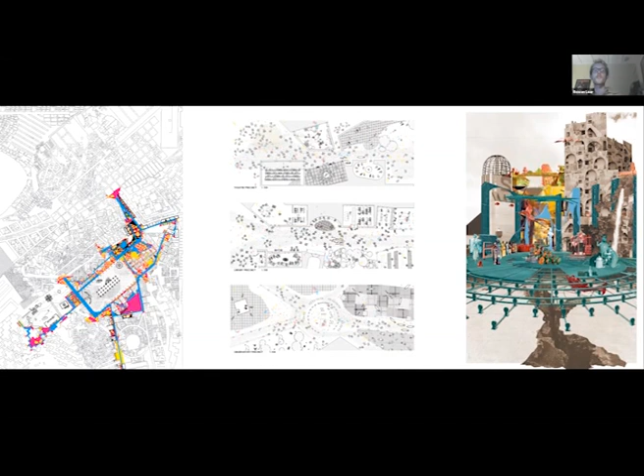The task of the Planetary City Studio has been an exploration into new forms of inhabitation set against the hyperdense background of Planet City, a near-future metropolis host to all of Earth's 8 billion people. The studio focuses on the typology of the Soviet social condenser, wherein performance was key in the development and propagation of alternative social values. The social condenser was an education scheme which used the methods of cinema to extend the scope of audience and situate ideological experiences at the forefront of culture, an extension of the project for total education for the new socialist citizen beyond the classroom or workplace. Social condensers provided the toolkit for us to understand how ideology manifests within rapidly changing environments.

In order to deal with the cosmopolitics of Planet City, our project has been conceived through the lens of a contemporary manifesto, calling for the radical planetary existence made by Bruno Latour in Down to Earth. He gives a recount or preamble to Planet City, a society unable and unwilling to respond to the oncoming climatic crisis. In our narrative of the space, which has been essential to our studio, society did not avoid that breaking point. However, it was given a second chance. Planet City was founded on an encounter with the new climatic regime.

Our reading of the Likhachev Palace of Culture is perhaps the downfall of the Soviet condenser, in that it existed as a funnel from other spaces in the city into a site, rather than an infection of the urban fabric around it. Our project aims to support the ways of living necessary under a new climatic regime, rather than the extractive practices of globalization or the denialist practices of localization.

This process of recalibration is underpinned by challenging the systems which perpetuate Western empirical knowledge and thereby keep it under lock and key. The project profanates the typologies of observatory, theatre, and library, three pillars of the Enlightenment. Rather than operating as fortresses for the superiority of empirical Western traditions, these institutions aim to open the gates to diverse and confronting traditions of thought and knowledge.

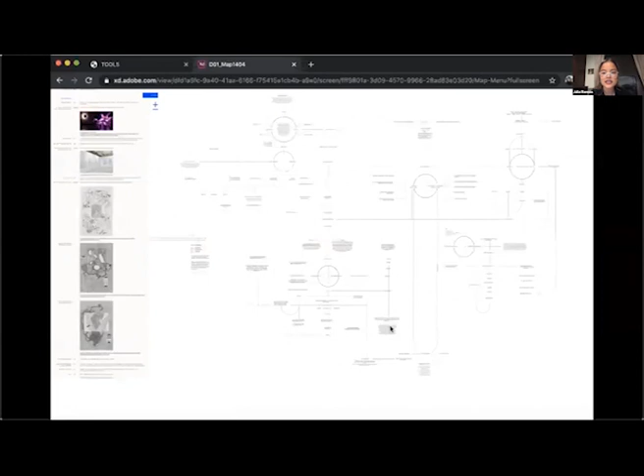In the same way, Nolan uses his tools as a vehicle to produce counter-narratives and dismantle dominant colonial discourse. We use these tools as a lens to speculate and unpack the workings of his practice. The tools most prevalent in his practice are astrology, scientific notation, decomposition, and the hand.

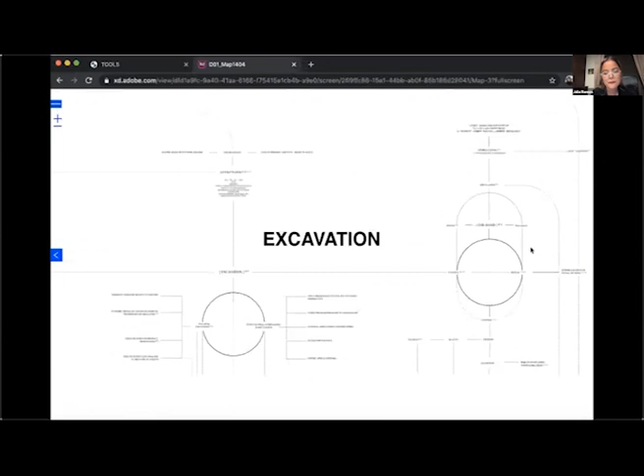Astrology is both a functional and symbolic system that opens a metaphysical framework where alternative and imagined realities can be generated and anticipated. It reflects upon the role and recognition of Indigenous sciences within a dominant scientific discourse. These systems of forming and exploring conclusions are embodied through his use of scientific notation. These alternate ways of reading and understanding time and space are further embodied through excavation, a tool which creates a means for the past to speak and generate tangible memory.

Its interpretation and reading reveals a multitude of truths, and these truths are connected through land and narrative. For Nolan, decomposition becomes a tool to embody the entanglement of past, present, and future, and a tool to compose. Finally, the hand is the initial and final tool in his process. It is a means of control to conceal, reveal, decolor, and reconstruct his narratives, deconstructing, demonstrating that the act of making things invisible is revelatory in itself.

This map explores the organized yet entangled nature of his projects and highlights the non-linear conditions in which he operates, an instance of which occurs in his 2018 solo exhibition titled Options, encompassing a range of artifacts, mediums, and works. He challenges the notion of finished work, using its vulnerability to misinterpretation as an opportunity for new knowledge to enter the space. He states, 'I think the work is only halfway done until it is read. The question is always who is reading, and therefore who is doing the other half of the work.'

The second document gives the user autonomy to navigate through the map of Dennis's practice. Starting with the main tool, the themes, theories, projects, and historical events are presented as options to interrogate both Nolan's practice and our methodology of researching his practice. As the user clicks through, a record of their path is generated on a receipt, which becomes a document where you construct your own narrative of Dennis based on your decisions.

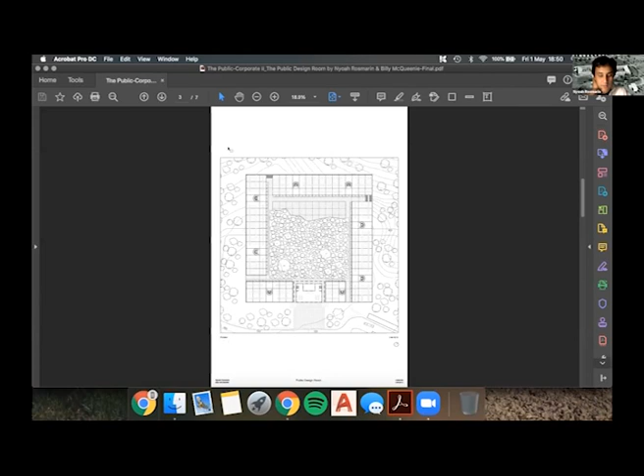Otherwise, the Public Design Room follows a private developer economic model. This operates where the office purchases land for a public building, the costs of which are offset by developing a private rentable project. However, as a social enterprise, the intentions shift from profit maximization to public good. The private development aims to only cover the costs of the public one and nothing more. Any additional revenue is plugged back into the state. This means the cycle of production is heavily managed by the office itself.

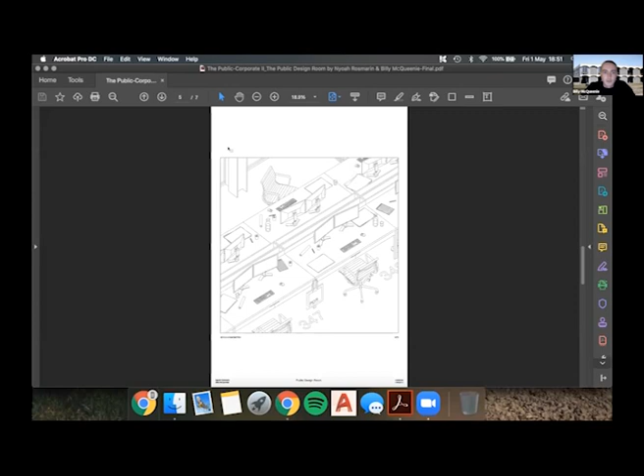The Public Design Room operates through the majority of staff directly working on the production of architecture. 850 staff are dedicated to the drawing room. 150 employees make up the auxiliary programs of the office, including a library, workshop, grounds maintenance, and others. Included in the 850 staff are the multiple in-house disciplines required to produce architecture, such as engineers, town planners, and architects. The Public Design Room aims to establish a consistent approach across the scale of office and works at 3 scales: the territory, the building, and the detail. Through a series of territorial interventions, buildings will be developed using a consistent shared body of knowledge in relation to detail and construction.

Armidale can therefore be seen as the initial territorial project of the office, and the Public Design Room as the first building to be executed as part of it. With the introduction of 1,000 staff and their respective families, Armidale will experience a population increase of roughly 10% and will inevitably alter significantly to accommodate this. Our proposal acknowledges this condition that precedes any architecture and further recognises itself, the architecture, as a well-intentioned but violent act.

The scheme wraps around the existing Robb dining hall. It repurposes it as the entrance and corrects the facade by demolishing the back of house, bringing the iconographic courtyard elevation to the street. Entering through the new lobby leads to a courtyard where the topography remains as found. The insertion of a platform follows the slope of the site and transforms the descending land into a flat, heavily planted and curated reserve. Long open drawing rooms flank each side, with meeting rooms and offices on the mezzanine above and auxiliary programs located in the level below. Services and parking sit in the basement. The building contains only a few ideas, but has ambitions to follow them through to the furthest possible degree. Thank you.

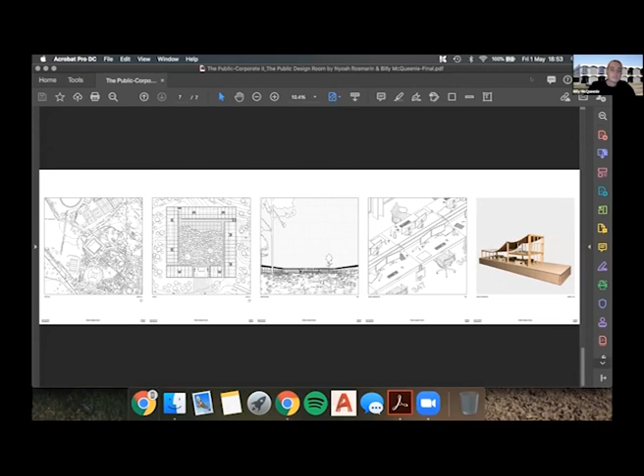Hi everyone, can you all see the screen? All right, tonight I'm representing Angelo Candalepas's studio, A Reading Room with a Throne. However, this presentation is going to be a little bit different to most. I'll be showing a variety of work from a number of students as well as my own in order to encourage discourse and critique of the studio's processes of design as a whole.

The studio will consider how to read architectural space, provide guidance into an understanding of proportion and how this affects the human condition, balancing between that which is drawn and that which is experienced. It will focus on transformative space and the concept of restricting possible outcomes in terms of external parameters and room forms to enable a focused consideration of the variabilities and expression available in architectural space.

This is the site, the Greek Orthodox Archdiocese of Australia's Cathedral of the Annunciation of Our Lady, home to the Archbishop of the Greek Orthodox Church. The brief is the studio's title, A Reading Room and a Throne Room, currently being developed by Candalepas Associates in their practice.

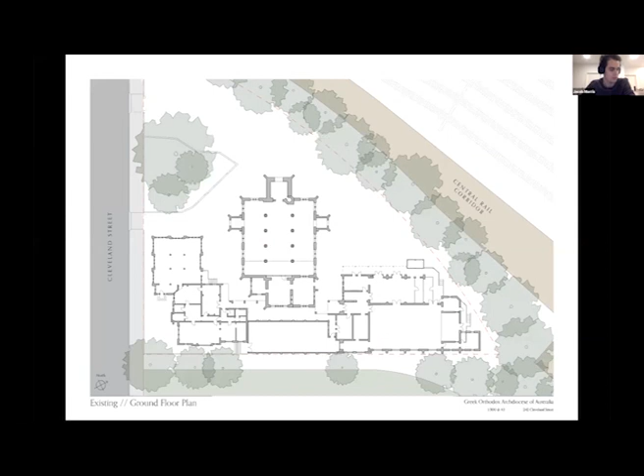The site is historic, a combination of Anglican and Western buildings, with the church itself designed by Edmund Blackett, who also designed St. Andrew's Cathedral. The set precedent for both the office and the studio is consistent: the San Lorenzo Library and its entry room in Florence, designed by Michelangelo.

The studio will delve into historical considerations of early Christian architecture and will visit various historic cities, including Constantinople, Florence, and Rome, in order to draw a lineage between early and Renaissance ideas about public rooms.

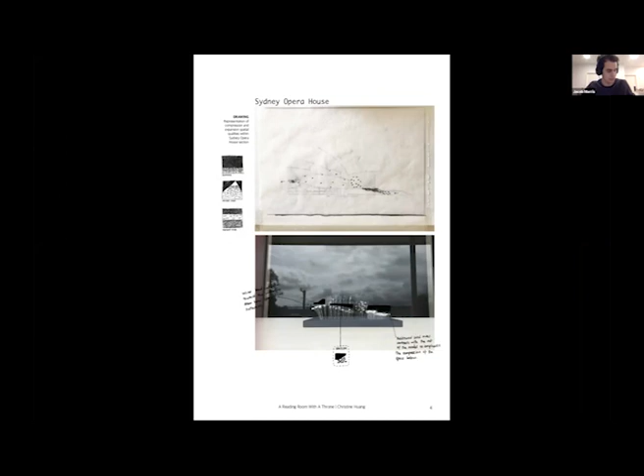All of us took on the Sydney Opera House as a precedent exercise, with the task asking each student to analyze the spatial experiences they perceived, whether through section, photograph, or, if they were lucky before social distancing, personal experience, and to model them in abstract form.

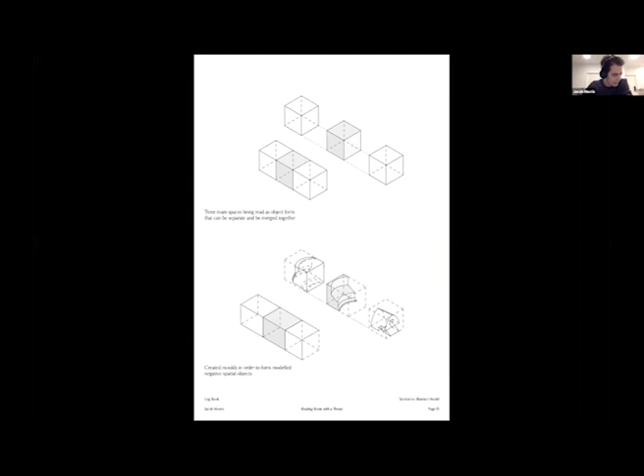What arose from this was a discovery of a very specific set of design spaces and thresholds: a compression of space to an expansion of space, a heaviness of atmosphere to an almost weightlessness quality. These journeys between spaces through these thresholds were then attempted in model form.

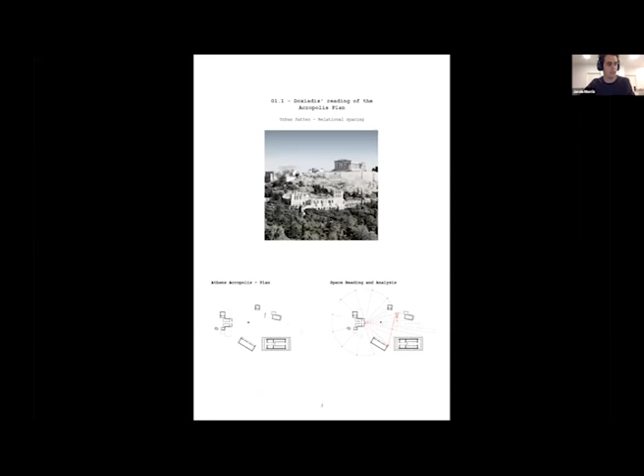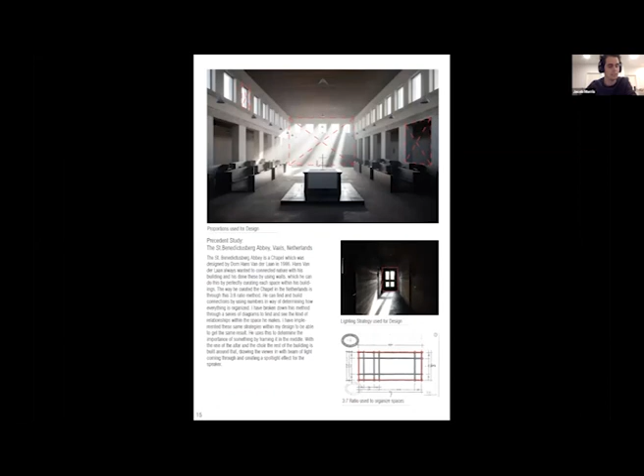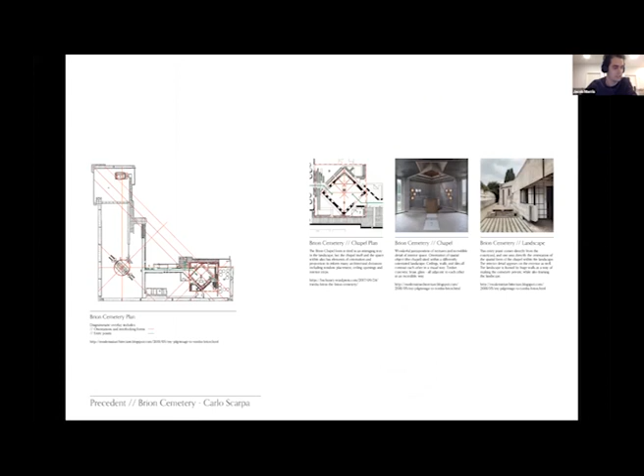Each of us moved on to our own precedent studies next. These included Doxiadis' reading of the Acropolis in Athens, the Theatre of Herodes Atticus also in Athens, the St. Benedictusberg Abbey in the Netherlands designed by Dom Hans van der Laan, Hagia Sophia in Istanbul, and the Brion Cemetery in Italy designed by Carlo Scarpa.

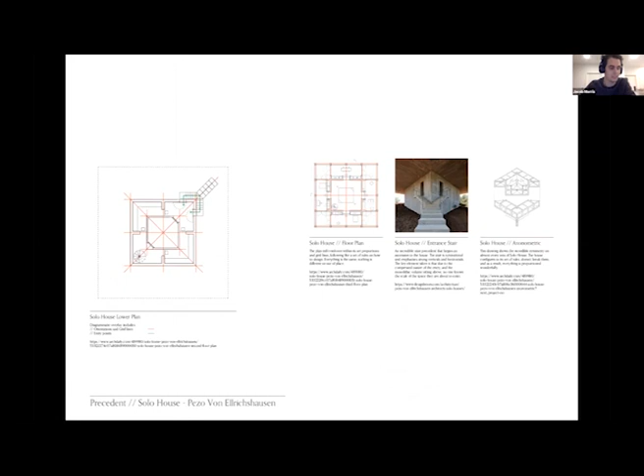These laid the foundations of understanding of proportions, sightlines, geometries, and orientations within the design of spaces. Further detail can also be taken from precedents: the way a column or wall is designed, the way one material intersects another, the way a specific stair is aligned—the impressions are endless. A combination of these values, along with an understanding of these foundations, meant it was time to begin designing.

For our studio, however, this didn't mean drawing. This meant writing—documenting our ideas of the spatial experience each of us envisioned for our design. 'Are you kidding, Angelo? We've just spent weeks with precedents ready to tear into designing, and now you want us to write?' But it was a little bit more than that.

How can you use words to describe the space you want people to experience? How do you want your space to feel, and how can you achieve that? Are you successful? How vivid can you be with your descriptions? Words leave themselves open to interpretation, and so the space envisioned by two people after reading the same passage is always different.

A combination of all these elements takes us to the beginnings of a design, an idea, a concept—whatever it might be. The combination of these elements, and the way in which they become encapsulated into a design, provokes some really interesting questions.

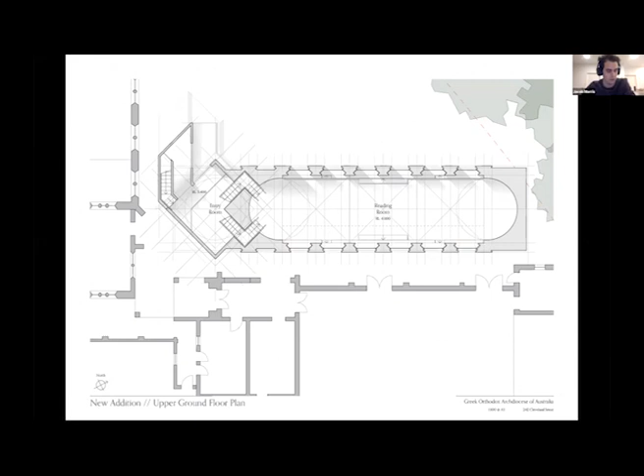How does the site inspire design? What begins to take priority when planning or designing a space like this? Is it the books, the throne, or the purpose of the room? Or is it the experience and the actual spatial considerations that come with it? Is it best to look towards historical precedents or towards newer design methodologies? All of this relates back to the notion of hierarchy and priority while designing a space.

Our tutorial this morning went a step further and was focused on a new process integral to designing an interior: sectional models and their play on light and shadows. This isn't just about how light falls or is brought into a space.

This is about what type of light is drawn in, what it might fall on in terms of materiality, and the orientation of the surface the light falls on. For example, light hitting a curved surface compared to a flat surface is very different.

This technique also plays back into how you want your space to be experienced, and all the work in beginning the design. The ideas have been established. Now we must bridge what has been drawn, made, and explained to what will be experienced.

Thank you. Thank you, Jacob. So we will open again to either continue the conversations from before or have some thought about what we're seeing, now and before.

I just want to briefly say that there's something really extraordinary going on with Angelo's studio, in that you are doing a studio that is absolutely haptic, absolutely somatic, absolutely about being in a body at a time when we have never been more out of our bodies. I think that would be a great pity if you did not really address that.

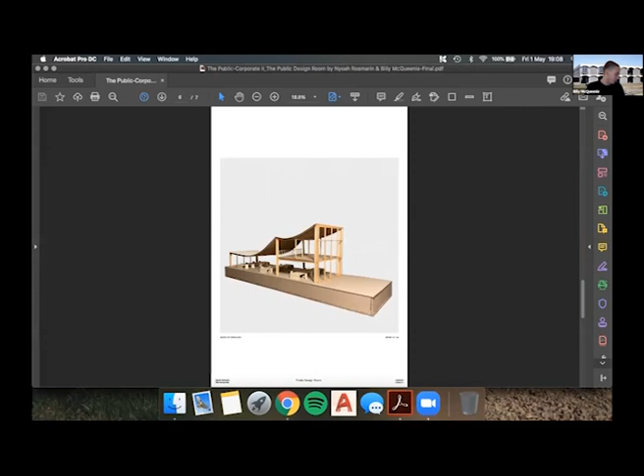...is in the sort of golden era of government architects, in the 60s and 70s, they were taking a lot of students, and it was a really prestigious place to work - some of the best architects in the world were in government. I think for both of us there's a lot of nostalgia about this thing that we are only really learning about now. And if this were to be a real office, it would be the sort of place where we would want to do a sort of cadetship almost.

There's a proposal - another student's proposal - to make it like a military coursework for students coming out of university. I think there's lots of value in that, because like Billy's saying, in this golden age it's a breeding ground, you kind of get the best of everything. You have access to real tangible construction and design, which is sometimes hard to find. In this golden age, I think they were saying there were like 1,500 students applying at one stage, for 12 positions or something.

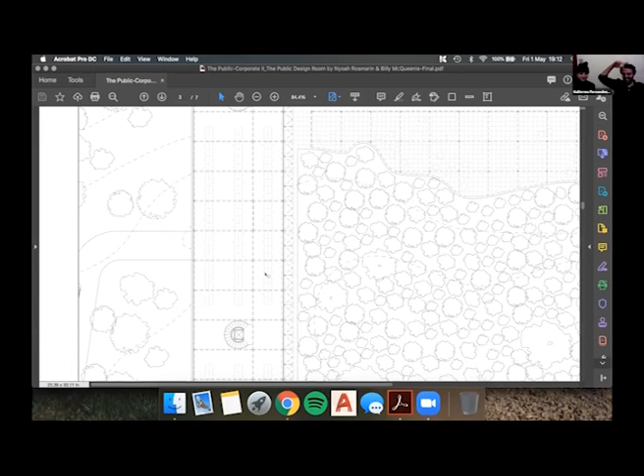In the top left corner. I think specifically for the plan, it's a very deliberate decision to have such long lines of desks and only two circulation cores. It's about building a cohesive knowledge of architecture, this idea of walking past someone's desk or across the room to talk to them. It's quite deliberately an inefficient plan, I guess.

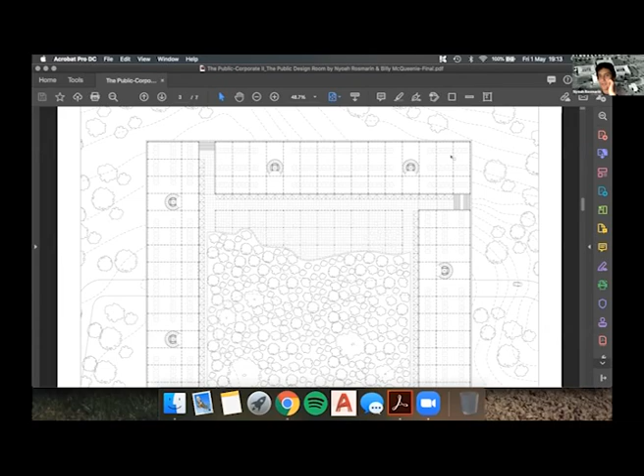I'd want to sit in the top corner because I can get a view of the lake. I was waiting for the corner office.

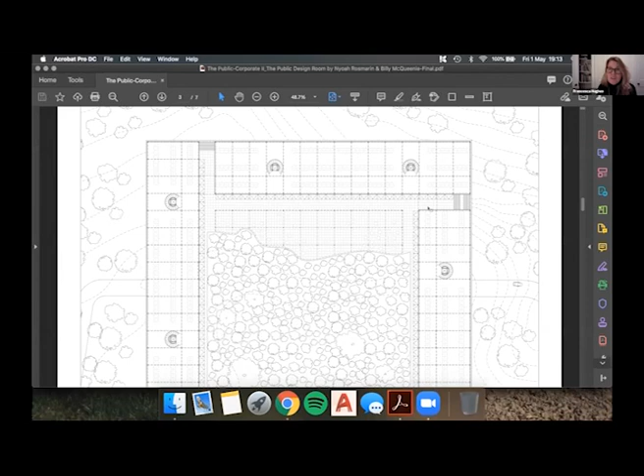What if the government architects were working from home? So much of what's embedded here in what you're doing, which is super interesting and important, is a kind of strange nostalgia for the atelier—an atelier that's almost 100 years old now. I'm wondering what that means.

But the atelier is better than the contemporary corporate office of Australia—there's no doubt on that. I think even though it's a very inefficient plan, there's a level of efficiency in being able to talk directly with somebody and not respond via PDF markup. You can just get it there and then and work through problems.

Sure, but I think in a sense to suggest a connection between the two studios, which for me is quite powerful, is what about the absence of the office, the absence of the atelier, the absence of being able to have this direct communication. Angelo was talking about how the power of these absent buildings are all the more evocative to us, not being able to get to them, not being able to get our bodies to them. So back to the slowness of architecture, I'm thinking about the hare and the tortoise—the slow one wins, yeah?

But architecture's always been very good at being very slow, while always talking about the present at the same time. For me, it's not an either-or decision—we have to be doing both.

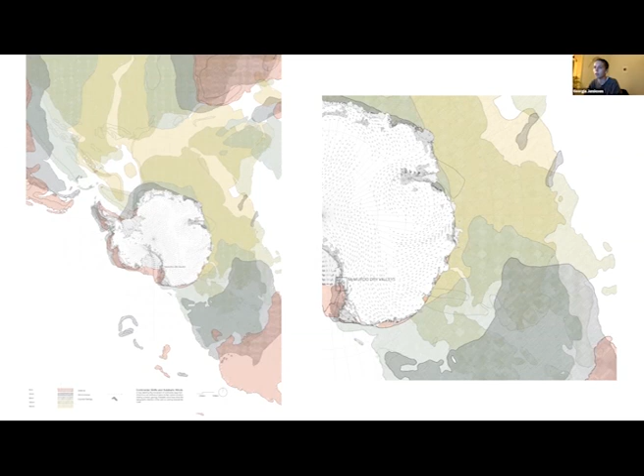In beginning to tell the story of endolithic beings, it was first important to understand in more detail the current geology of the site and the timeframes in which it came to be. This is essential to explain the notion of niche and site specificity, as in essence, the endolithic communities pop up in place, with their high genetic diversity attributed to the rocks in which they live.

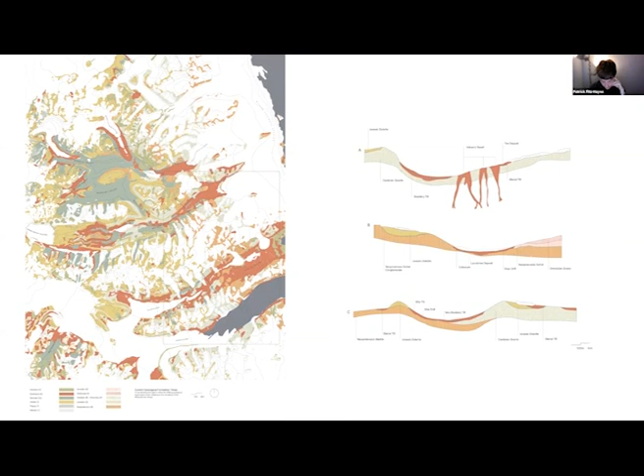This thin veneer of habitability is not to be mistaken for vulnerability, but extreme endurance. These communities colonize the interface of biology and geology, a mediator of the living and non-living. Endolithic beings are some of, if not the oldest beings on Earth, surviving the perpetual flux of geological processes that has seen other beings perish over and over again. The rapid changes in Antarctica brought on by human unrestraint are a mere blip in the radar, a chance to sharpen the toolbox in the face of unstable environments, ensuring survival through this epoch and well beyond.

A hatched overlay describes the formative geological movements of the valleys. These processes inform the geology's structural composition and how they came to be. This is a map exploring the rocks at their present and ever-changing state, using this as an expression of the constant flux of the Earth. The rocks are alive in constant metamorphosis, as are the endoliths living within them, and it is this slow and constant transference of material that highlights the enduring qualities of the Earth and the ephemeral nature of our own existence.

Proposal for a new Antarctic treaty. The warming of Antarctica will uncover more geologic terrain. Endolithic microbes return en masse to full reproductive capacity. The primary producers of this environment endure. The Valley of the Dead no more. Care cannot be fueled by fear of human mortality. Care should come from an understanding of the continuation of the Earth beyond us. This forges a new way of thinking about deep time and our place within it. Can we ever scratch the surface?

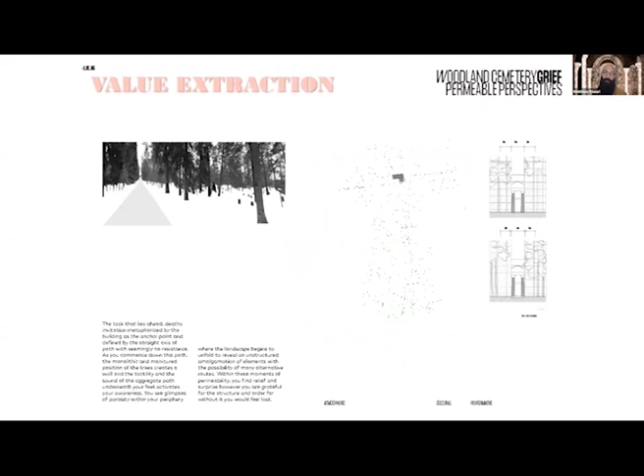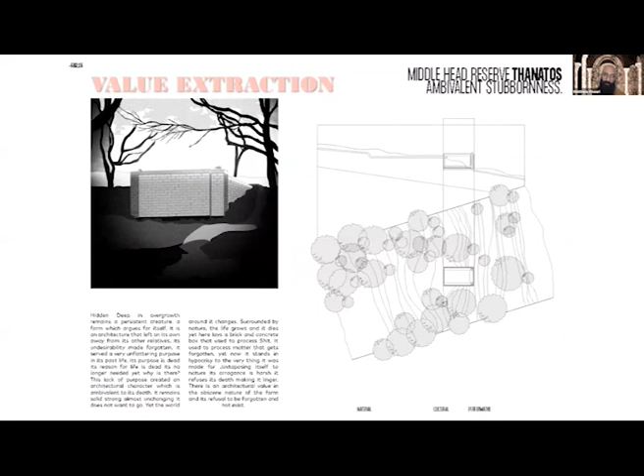As part of the process, we produced effect drawings, which showed us exactly what was happening in the effect. We produced an apparatus drawing, which showed us how this was being achieved. And then finally, we wrote a curatorial narrative that explained exactly why we subjectively believe that this is of value to be kept as a memory of architecture.

15 students collectively produced 60 values in 1 week. We then auctioned off these 60 values as a collective. We ended up with 35 values, and these 35 values became part of our first iteration of the site plan.

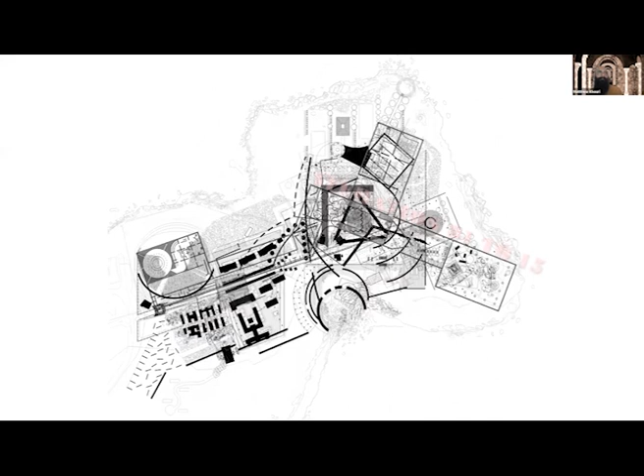15 site plans were then produced by 7 groups in 1 more week, auctioned off in the same process as the value extraction process that took place previously.

This took us to the mid-semester review. Among others, the feedback revealed that we were still site designing, something we've been doing throughout our entire studio or professional careers. We weren't curating yet.

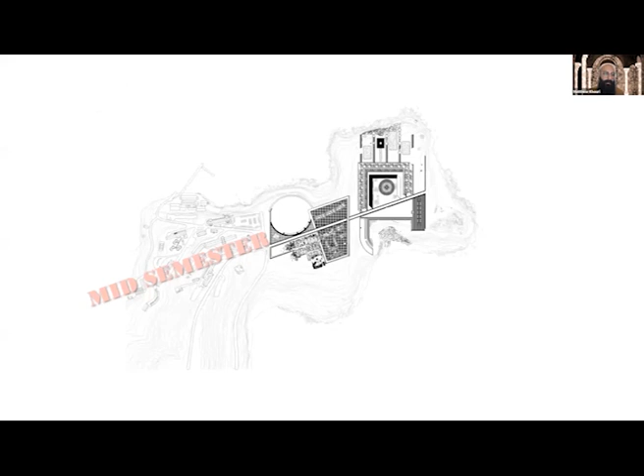So we revisited, we tried again. And that's okay because we're disaffectionate with our designs. This is part of our process.

It turned out to be quite an important step. We recognized something about the site. A couple of us visited, who were fortunate enough.

We now, as a result, have a curatorial action based on what we recognized when we attended that site and from what we read. We have a curatorial action based on the invasions that have taken place on this site.

The first of which is colonization as a political intention. The second is the militarization that has been used as a tool and excuse for colonization, to oppress and inflict violence in order to defend what is considered owned land.

The third is the consumerization of this very thing that establishes an economy. And the fourth is the invisibilization and visibilization process that has been keeping this ideology alive.

It keeps it going. This is ahistoric. It's happening right now and still happening. These four types of invasions are historical phases on the site.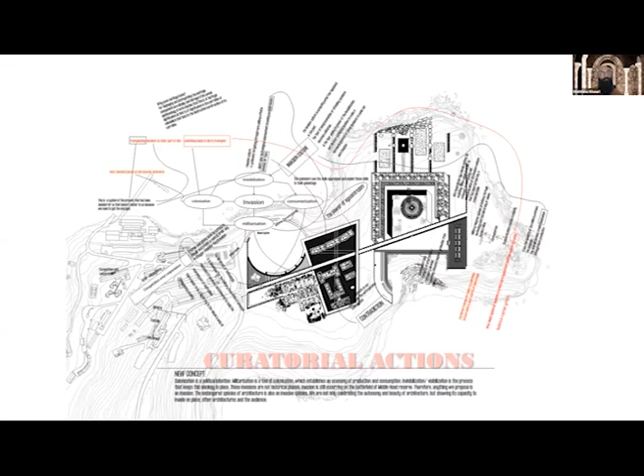So architecture is an endangered species, but it is also an invasive species. It doesn't mean that we do nothing.

Part of our translation of our curatorial strategy onto the site means that we start with anchor points of existing values on site. Part of the value extraction process, one of the precedents was the site itself. And now we're anchoring on those parts of the site.

The museum then becomes an epistemological machine that grows inward towards itself. By anchoring on the site and invading with the extracted values, the invader becomes invaded in a mutual reversibility.

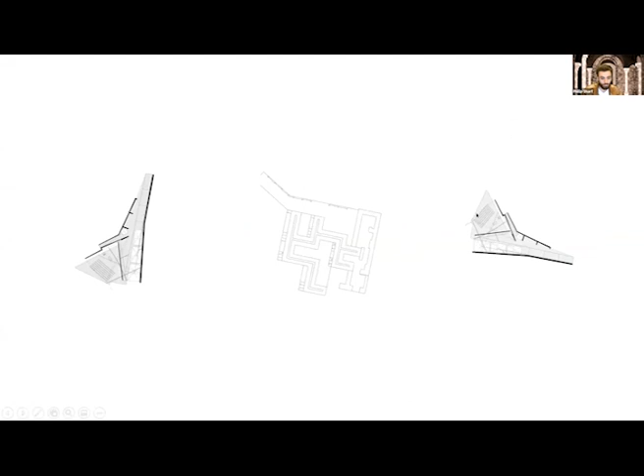The perpetual invasion creates dialogue between the curatorial body and its environment. And in doing so, we subvert the dichotomy between beauty and ugliness, sacrosanct and the profane.

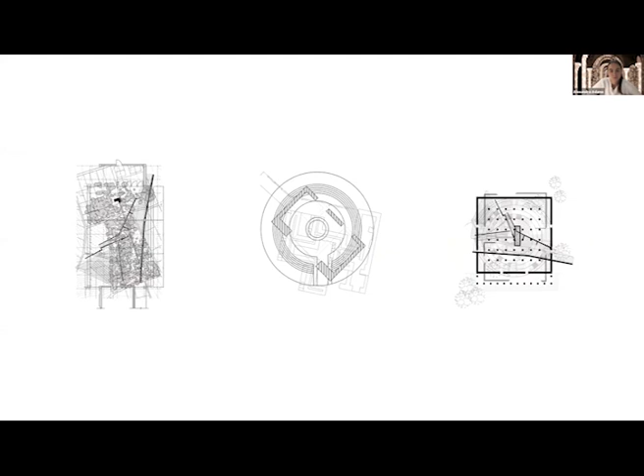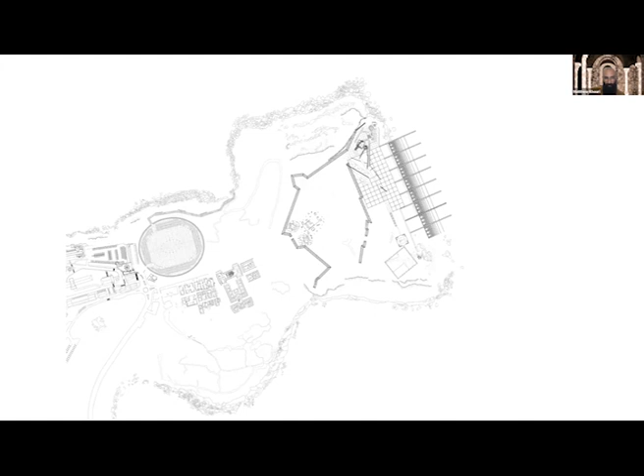We now remain as a single group of 15, working on a single project, but now we rotate around various roles: lyrical representation, physical mechanisms, site plan, one-to-one mock-up, systems integration. We can't wait to see what happens in this incredibly slow, valuable process that is what we're calling architecture.

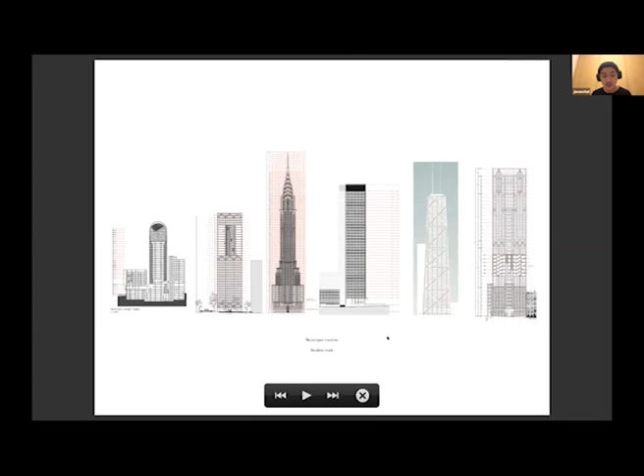The strategies that we employ to tackle the issue of loneliness need to first be explored outside of the archetype. We need to first expand on conventional methods in order to truly understand its complexities. The challenge is the eventual translation of these ideas into an archetype that city so clearly relies on.

We need to be critical on how we all perceive the definition of loneliness, as it affects us all in different ways. And so we've learned about the notion in different mediums, from film, lecture, and deconstructed its ideas and expressed them in a form of an artwork, a drawing, or within an essay.

As a student from our class, Troy defines it as a feeling like I shouldn't be somewhere at a particular moment in time. I believe the connection to place comes first, then the connection to people follows.

Our final designs for the mid-semester were to design spaces to hold activities to the stranger. These range from a space for listening, a space for swimming, to a space for proposal. Once we begin to understand how these activities are performed, it ultimately reveals how we interact, behave, and feel towards the space and the individual.

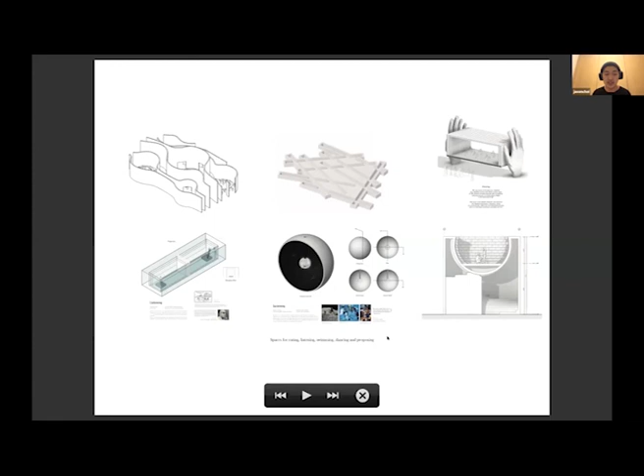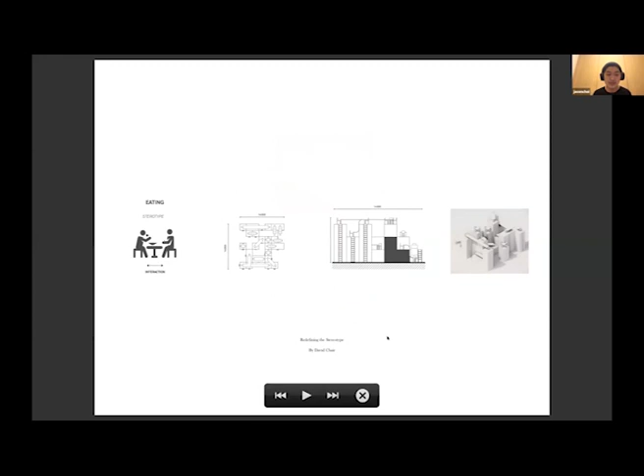David's approach looks at redefining the stereotype of the activity to create an unusual encounter and essentially establish a new norm of social interaction. My understanding of loneliness extends beyond the lack of physical contact, but towards a lack of belonging, a lack of being able to relate and contribute to an everyday environment.

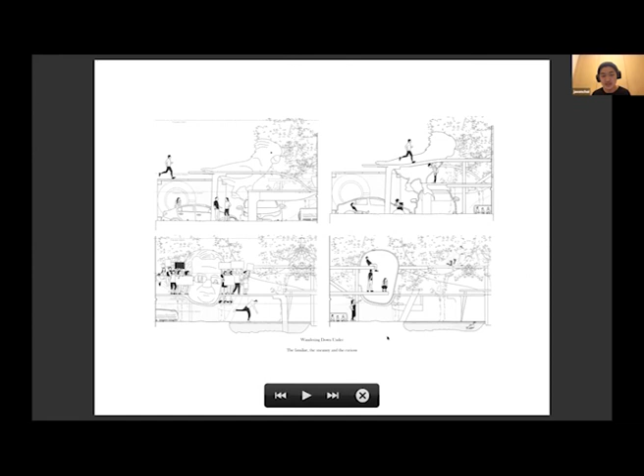My design blends the mental threshold between what is familiar and uncanny in order for the stranger to truly establish their own meaning of the space. They're able to create their own sense of inclusion to a space that seemingly has no predefined function.

By deforming a personal object such as a table and inserting banal objects to a large proportion, it allows the stranger to feel curious. It opens up the opportunities to feel included in what is familiar and uncanny.

The familiar is what begins these relationships. The curious accelerates them, and the uncanny creates diversity and new opportunities.

A place for fighting and protesting next to a sculptural representation of a key political figure, such as Scott Morrison, invites people who are fighting for similar values or disagreements. However, the duality of the sculpture head is able to contain a space where people may want to listen as they are not ready to participate yet.

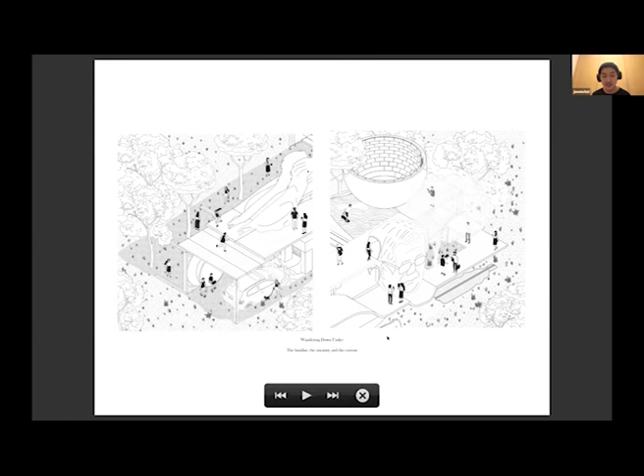On the other hand, Sarah's proposal for fighting is expressed differently, as she believes loneliness is understood through the lens of its invisibility and the potential of the trace left from one stranger to the next. The space provides users the opportunity to leave a form of vandalism, giving them a sense of control.

The familiar and the uncanny are what I believe drives, strengthens, and establishes relationships. Relationships between the individual and the space, or between the individuals. Loneliness is driven by the lack of relationships, the lack of inclusion, the lack of being unable to share the familiar and the uncanny with the space or individual.

Highway 86 uses the highway as a familiar object and deforms the geometry in a way that the character of the object is intact and the space becomes curious to the stranger.

Within the section, SITE architects are able to organize the uncanny, being objects that you don't see every day, the helicopter and the submarine. The curious objects where you don't see the full object, and the familiar objects in curious spaces, the everyday types of transport on a wave-like geometry.

This creates a constructed journey amongst a collection of ambiguous objects to create a series of continuous exercises that jog the feeling of being familiar, being curious, and being uncanny.

Highway 86 uses the object's scale and rearranges them spatially to create a variety of public spaces. It uses the meaning of the object being the car to mask the overall intention of the space.

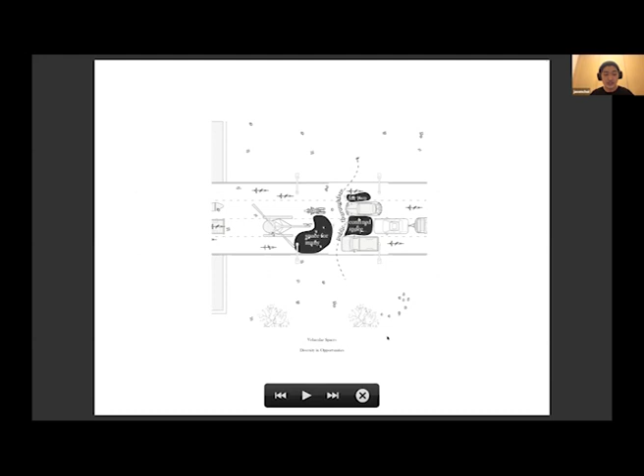The submarine of Highway 86 sits on one of the lower elevations, but due to its largeness, it is able to give the user an overlook of the highway. The object itself becomes a place. The stranger has understood its character and height advantage and established that this is an ideal meeting place.

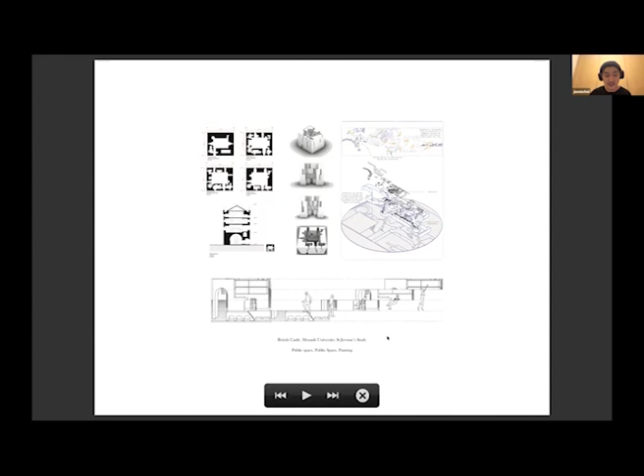Whilst we deconstruct architectural precedents to understand the spaces themselves, we also begin to look at how these notions of aloneness and loneliness can be conveyed through a different apparatus, analyzing a series of films and understanding the visual techniques deployed.

Peter Greenaway uses the object not merely for its function and decoration, but as a symbolic gesture to invoke the individual. A lot of his scenes are constructed like a painting and tend to make you question the normalcy of it all. He uses objects that are familiar to the individual, but positions and frames them in a way that is curious and uncanny. For one of our first tasks, we were asked to design a space for the alone.

And whilst the loneliness is not by choice, to be alone is. We designed a music space that is surrounded by a series of mirrors to give the stranger the feeling of being outside, inside. The mirrors of the space initially were to reflect a natural environment. However, the mirrors could be seen as a simulacrum, a series of panels that each represents someone or something.

We began to do analysis on if the space was to be inserted into a cityscape, to potentially see how the mood or atmosphere of the space would change, and begin to blend these two environments to reappropriate what is real and what isn't. The space is surrounded by panels of nature, but surrounded by cityscape. Each panel begins to represent an object of the environment. Whilst the natural shows gum leaves, branches, the sky, the city reveals architectural elements, such as the crossbeam or the brick archway. And while some objects are more identifiable than others, mixing the two environments creates a new experience, blending what is familiar and uncanny.

Thank you. Thank you. Thank you very much.

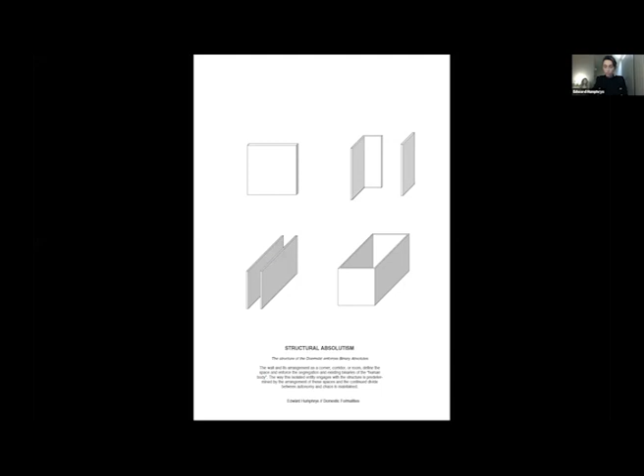In performing the charrette task assigned to our everyday encounter, I realized my own domestic scenario, which is built of three walls and a window. I was interested in the mediation between my moment of domesticity and the world beyond. Georges Teyssot suggests the window exists as a product of gaze and reflection. The apparatus of the window informs this gaze, and the idealized domestic condition is projected onto the outside through the window.

Trying to understand this idealized domesticity and the values our domestic projects as essential, I was drawn to Guy Debord and the Society of the Spectacle. The systems of wants, desires, and needs enforced by the window through the reciprocity of gaze and reflection have powerful biopolitical connotations in our protection of binary segregations. Similarly, in my own situation, the modernist glass facade of my own house was only enhancing the Victorian values and rules of the model home. I want to flirt with this division and engage with the apparatus as a tool which instead bleeds and blurs the relationship of the body political, the domestic, and the city.

Taking away from the binary, what if we start to engage with the idea of the system? I'm going to bring it back to the body for a minute through my own experience with my body and gender, as well as the scenographic work of academics such as Rachel Hann and queer crip theory.

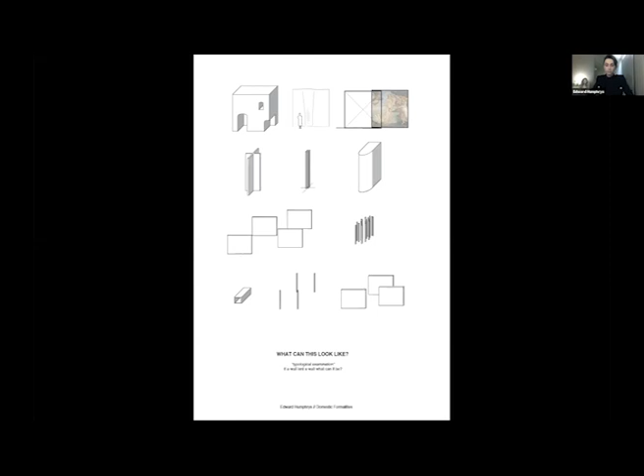So if we're no longer about the binaries and we're about the fluid systems, I started through the examination of the propositions shown. I tried to dissect and unpack the boundary lines, strategically examining thickness, porosity, and permanence. These lines, however, exist without bodies. By bringing the body back to these actions, can these propositions connect with fluid systems of body assemblage?

So then, in conjunction with the studio, we began to dissect the spaces of the home. By retrospectively examining the culture of the bed through art, the potentiality to reappropriate and re-understand the bed has materialized.

I then began to examine how a space could operate which enabled the fluidity of relationships between object and the systems of body. So for this example, how could a bed engage with the individualized spectacle of desire and hormonal systems of lust and taste? Could the radical reappropriation of boundary, window, and privacy offer a new type of domesticity?

Moving to the next phase, the fluid systems of the new domestic are being applied to the scale of the block and the city. As a studio, we have begun to unpack the relationship of program and privacy in the Roman insulae. We have then begun to apply some of these strategies to our site at the closing Powerhouse Museum just down on Harris Street.

As a class, we are beginning to collectively develop a new master plan for the controversial site. Our plan aims to offer and suggest the exciting potential and possibilities of a new system of domesticity for the controversial development. Thank you.

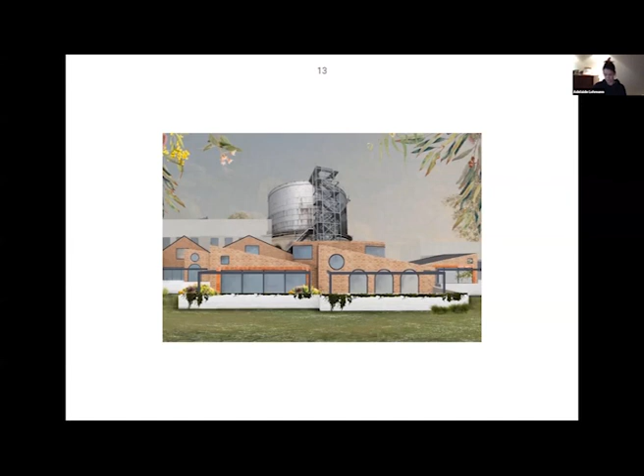Here we study the suburban scale. Then we continue by looking at the interior views that helped us understand the scale and materialities of the design.

This is our school as it stands now, and we'd like to introduce it as an all-accessible primary school that caters to people with and without disabilities, referring to it as Brickfield School and Centre for Learning.

This is our site plan. So what we've realised is that the public school, delivered by the government for public benefit, is a typology that can accommodate public use beyond the cold, private, cut-up-and-sell logic of the expanding suburbs.

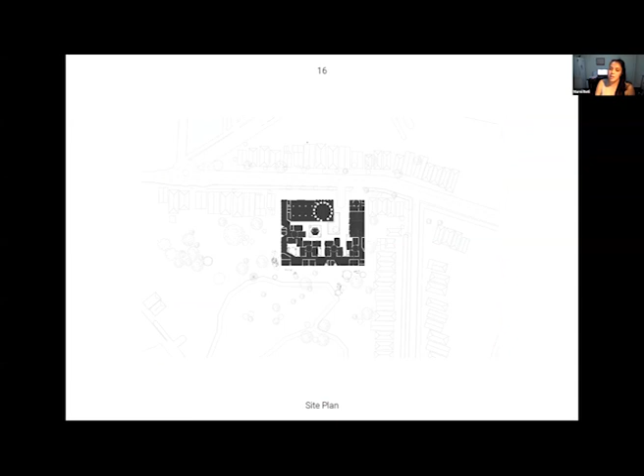Our school is designed so that the civic functions are on the street front while allowing the classrooms to overlook the park, encompassed in a brick envelope that explores the featurism and Ashfield brick treatment we've identified through our photographic report. This is our plan.

We've implemented a strategic cul-de-sac-centric design strategy, extracted from the domesticity of Ashfield and adapting several strategies from the Miles School, Geraldine Primary School, and Marawina Long Daycare. We've created these community spaces and composite class learning.

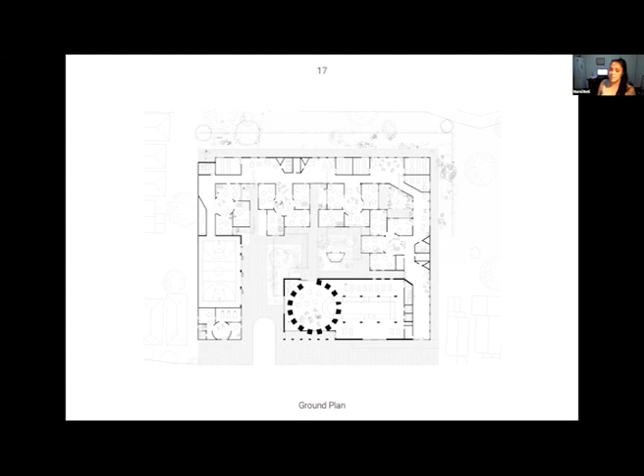As you can see, we have these internal streets that lead into our cul-de-sac spaces for collective learning, stemming off the main streets and acting as common areas. The classroom clusters around these cul-de-sacs, with each classroom having its own aspect to a courtyard.

We really hope that this language creates a sense of ownership for each class and ultimately a community across the neighborhood and a greater sense of community across the entire school.

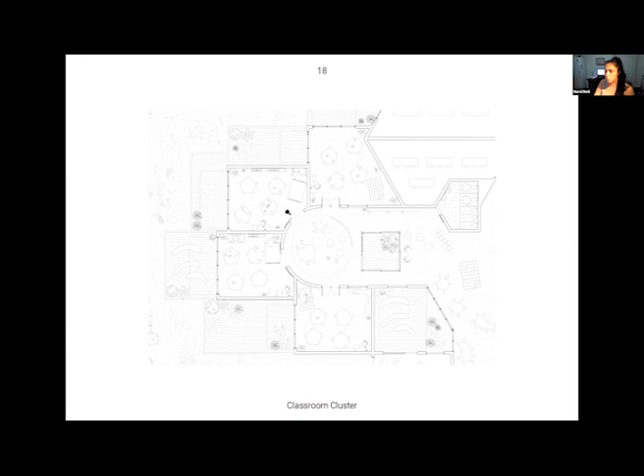But as a fundamental studio, we continue to develop our project through the resolution of details. The beauty of Ashfield for us was the featurism, the brick treatment, and the variation in scale from its civic program to its domesticity. These are the principles we applied when addressing our two programs.

Our civic program is the school library, also acting as the public learning space. We imagine it to be quite grand in scale and space, celebrating the verticality of the reservoir.

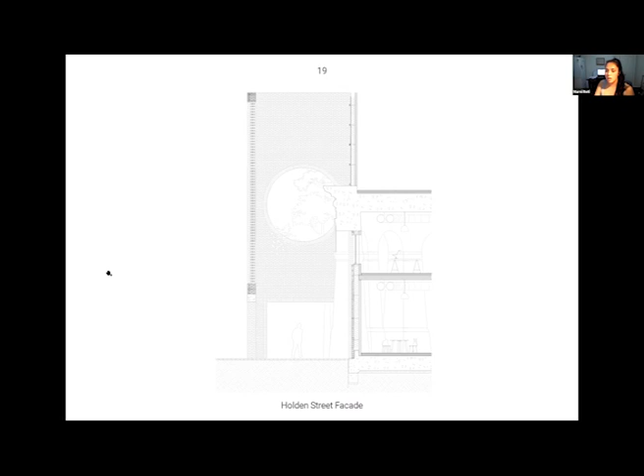In contrast to our civic program and language, which speaks to the monumentality of the tower and Ashfield's civic programs, our classroom celebrates the domestic scale and kitschness of Ashfield and its public presence that we really love, speaking the same architectural language in a slightly different dialect.

All the schools in our studio are a provocation that the suburbs can engender a new kind of suburban civicness by saving these endangered sites through public intervention. Thank you.

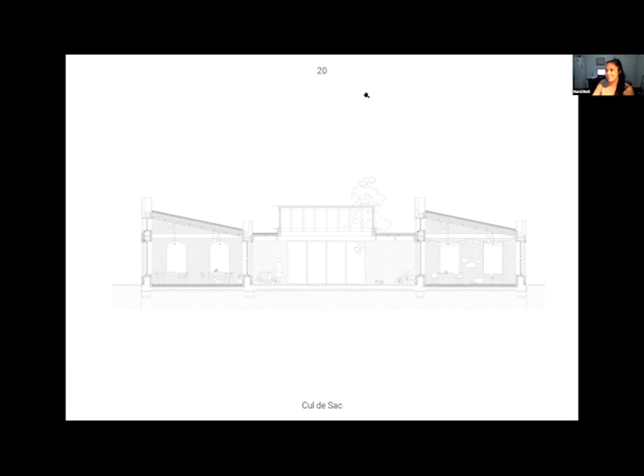Thank you very much. I think this group is clearly sited, in a way, in Sydney or in New South Wales, and I think that's one of the frames of the discussion I was foreseeing. But I want to open it up to the jurors to continue the conversation.

It's difficult. I have a question for the first project, and then also a comment on the second project. Regarding the first project, what I found quite interesting is that at one point you say that the body is not an absolute entity, but an assemblage of systems.

Which, let's say, entails an interesting point that can also be translated into space. Absolutely, yeah, and so I was wondering how you apply this concept to the space you're thinking about.

If it's something that you imagine, I know it's very difficult. So yeah, I guess it's quite hard just where we're at this semester, but what I've been trying to do is kind of unpack the relationship between this existing body politic and our space.

So that's why I was looking at the role of the boundary and the opening and all these things. So I guess in terms of moving forward, it's about producing a system of radical potentiality and almost like a...

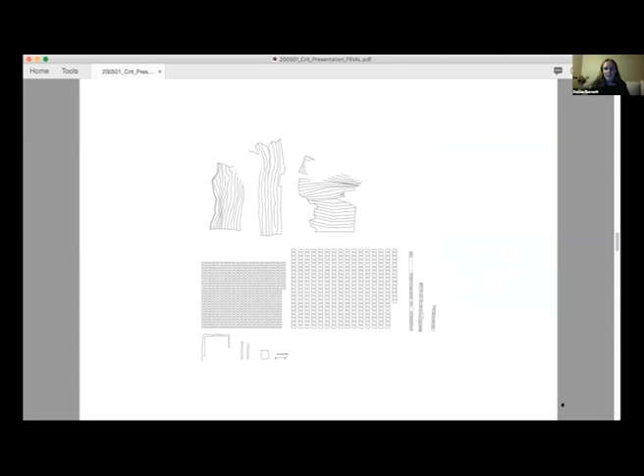To help us archive the full scale of destruction through the lens of the document, and ultimately catalogue the ruins of Rosedale in their decaying stasis, now prolonged by economic uncertainty. Through the lens of current policy, we looked to the future of North Rosedale.

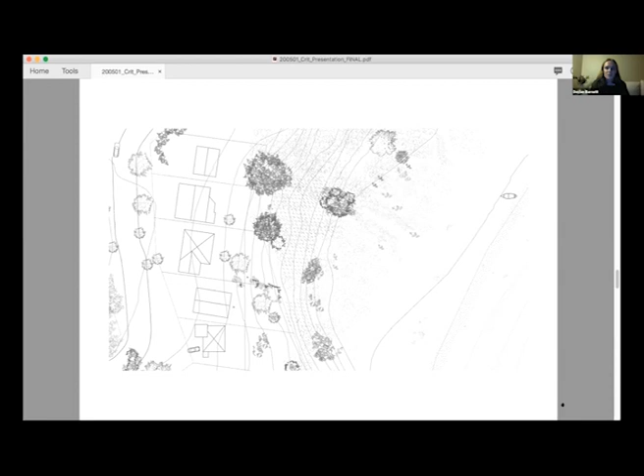What if residents followed the existing guidelines? Where would they be living? It was here we stopped.

If we're going to talk about policy, then we wanted to go into the history of these things, the history of the two lands. We drew a long section, or as Francesca said, it's more like a panorama, which explores the history in a non-linear way. We see the two mirrored drawings as footnotes to one another.

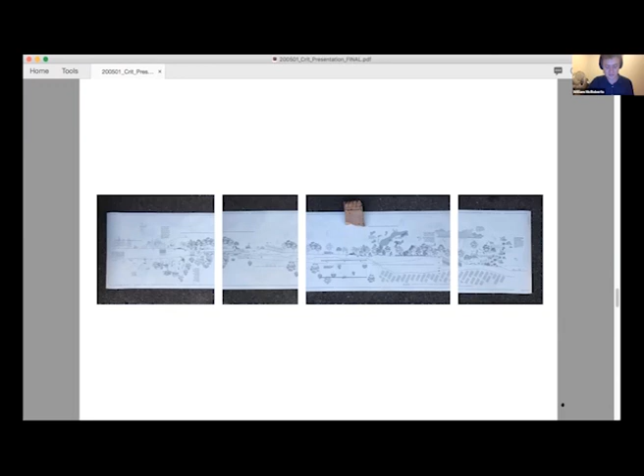We aimed to create a drawing that presented our research non-hierarchically and legibly. We added annotations and references, but we also wanted the reader of the drawing to be able to tie things together in their own way and time.

The drawing looks at forestry waste disguised as animal habitat. It burns so hot, it bakes the earth for 30 meters around. It also throws balls of fire long into the distance. Underneath, the sheep have been introduced. Their little hoofs compact the soil, their little jaws wipe out the yam. Cultural burning workshops go on as the ruins lie.

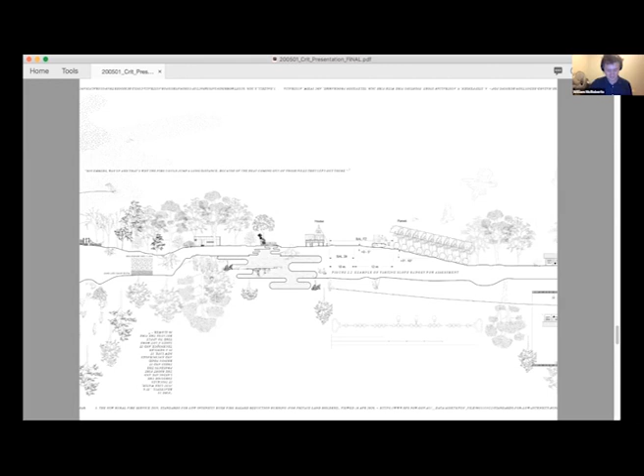The more money you can spend on fireproofing your house, the closer the trees can be. Underneath, the redcoats have arrived. Assets are protected and birds fly. Lands are measured, divided, and they're sold. How far can a musket travel?

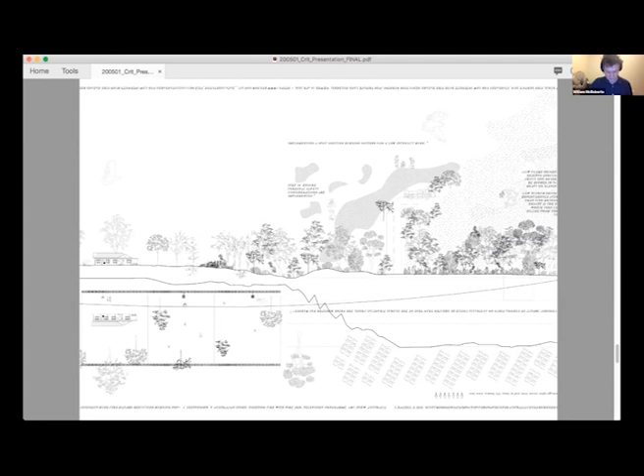Ruins lay still, insurance companies are busy, and the economy is hibernating, remember. Plants creep through the cracks. Some people use fire to reduce the hazard. Be sure to maintain a low scorch height, less than 5 meters.

A scorch height can be measured as the height at which leaves are killed by the fire. Indigenous practitioners let the fire trickle through the landscape. Read the land, wait for a storm, burn at the right time, cool and slow. And below, that's the loss that's counted: 382 homes.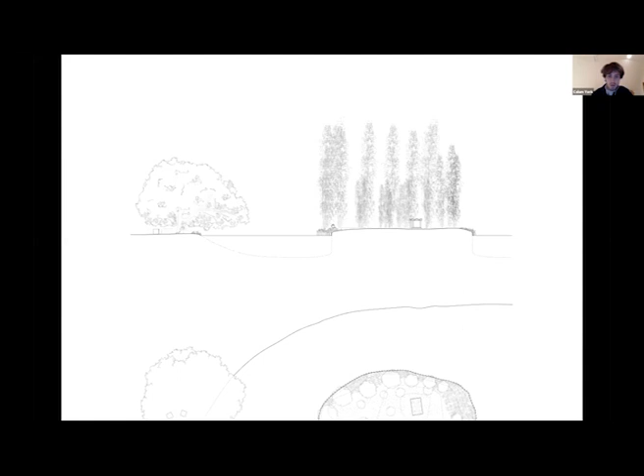This is one of the precedents we first looked at, which is Jean-Jacques Rousseau's tomb in France. What's critical is that it's no longer a tomb, it's an epitaph. The body's no longer there, but it still serves a social function. Visitors can pass by and contemplate, and there are sort of physical layers to get through.

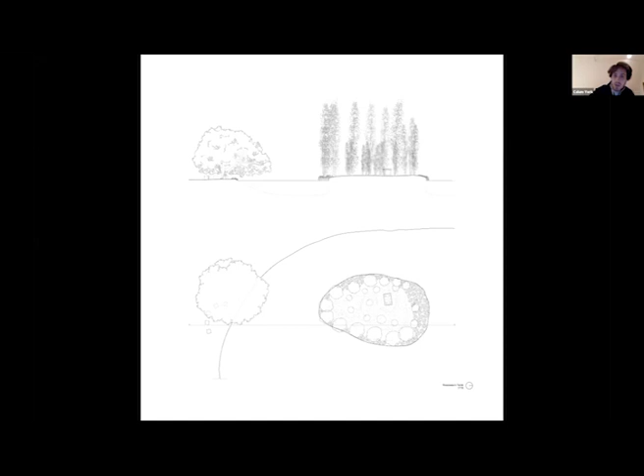The island itself separates the epitaph from the visitor, and you have those rows of poplars between that. We also looked at some contemporary examples.

This is Woodland Cemetery outside of Stockholm, where Lewerentz and Asplund carved out from an existing pine forest that had overgrown in gravel pits, various spaces: open fields, formal and informal meandering paths, to allow the architecture of the landscape to shape specific journeys throughout the site.

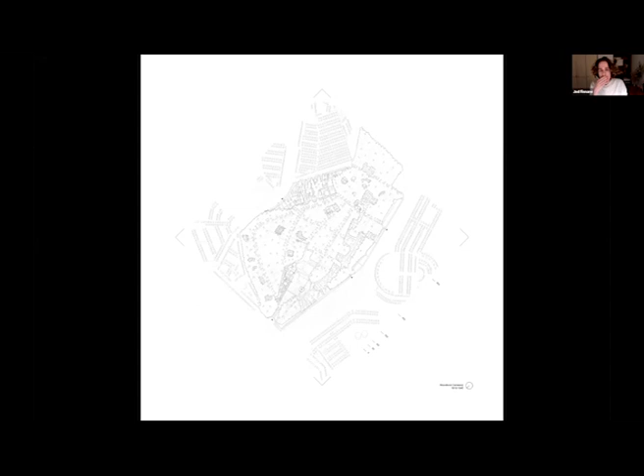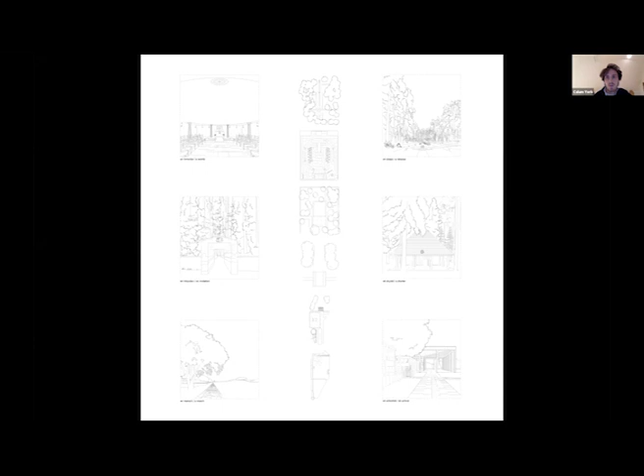If you look at the sequencing through that, following from bottom across to the right and then up to the next row, you can see that it's a highly curated processional beat through the site as you walk towards one of the many destinations, the Woodland Chapel, starting off completely expanded and slowly, gradually narrowing in until once the ritual is over, it explodes outwards once again as you are released into the world.

If you compare that to Waverley Cemetery, it's not quite as successful. You start off compressed, quite quickly expand, and that's the state that remains across the entire site. It's clear that in this case in Australia, the infrastructure is trumping the ritual. Cramming as many graves in as possible is more important than actually appreciating the dead.

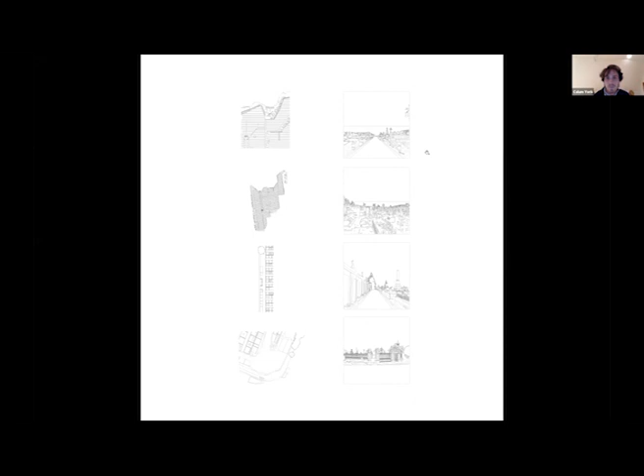We looked at the historical conditions of the site to try and understand what can be done to mediate this sense of banality. We reproduced the pre-colonial past, looked at heath on sandstone examples from down the coast, and then also compared it to its first iteration of when the cemetery was opened.

The land was cleared of native ecosystems, like much of the east coast, where the land and nature was almost completely erased.

The current site plan reveals that a lot of Sydney cemeteries have inherited these colonial systems of organising deathscapes. We see the Victorian grid and strong axes which are interrupted by roundabouts and monuments. And it's all about this escapist view of framing the view out to the ocean.

And we can see that in the base we've got where this cliff has been eroding. The whole site is a geotechnical hazard. It's all collapsing, and it has this kind of duality with the speed of an ecological crisis where the site is all slowly going to be submerged and fall apart. Within 50 to 100 years, it's estimated to be a likely risk to human life.

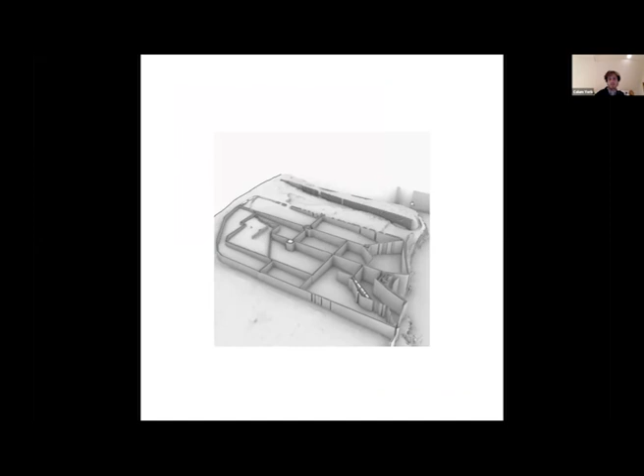This was the early mid-sem attempt, and then these were attempts that were made immediately after mid-sem, trying to understand the extremes of the changing site and its terrain, how the site has explored cut and fill, and looking at its span and potentiality in exploring the massings.

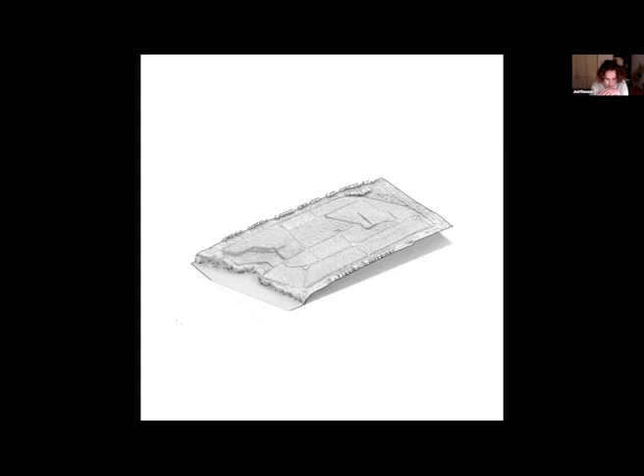So looking closer at the site, you start to uncover that its whole colonial history is a history of excavation and fill, from the filling in of the original gully, the ballast brought in for the roads, excavation for a local sandstone quarry that was then used for the sandstone gravestones around the site, which was then refilled so you could put graves on it. Fertile soil was brought in for lawn grass, and the graves themselves.

The gully collapsed in 2016 and has since been re-engineered and refilled, which sort of takes away from the idea that a cemetery is an untouchable space. And so this is where we are now, maybe finally ready to start designing things.

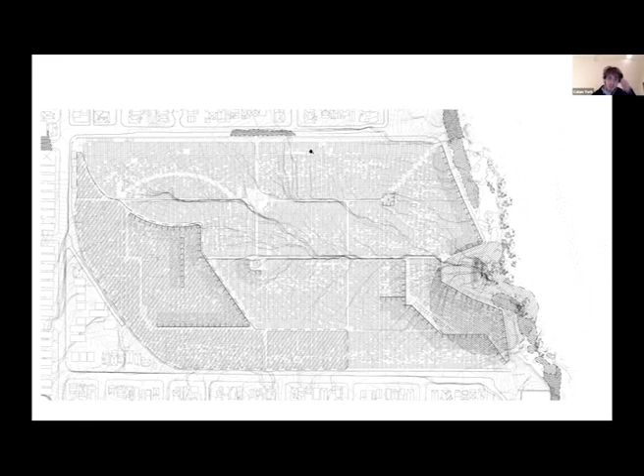So it's about this dual need of trying to meet this current urgent crisis, seemingly urgent, which potentially only has around 5 years left of capacity, and yet also shaping the long-term future of this site for the next 100 or so years.

And we ask in the studio what capacity these spaces have in allowing us to contemplate our shared mortality and finite presence. Yeah, super keen to explore these in the next few weeks. Thank you.

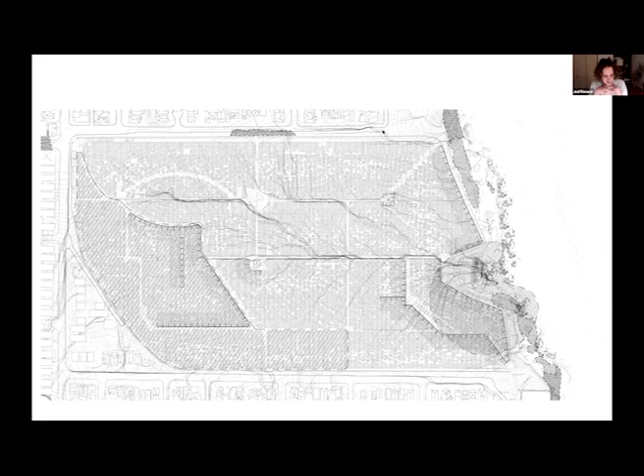So, comments? Sorry, this delivery guy just arrived to the front door, so I have to, sorry. Let's continue.

I'll just quickly start because I have to leave everyone. I'm so sorry. Thank you for having me. It's been a beautiful session and I've really enjoyed it. But just quick reflections on the first presentation.

Both of the presentations were absolutely poetic and kind of put me in another sphere for a little bit, which is really reflective and quite moving. Again, to mention for the second time today, Kathryn Yusoff and her text on fire and on breathing, I think is very valuable for both of you to look at.

And on the first presentation, I found this methodology of strata and of layering across the way that you work, from the film work and also in how you construct the drawings, really interesting. I really encourage you to mine as much as you can, literally and figuratively, working with this idea of layering things and of things that rise to the surface and then also erode.

If you can start to be more explicit with that in the drawing, I think it might shift things up a little bit. But also this notion of breath, I think, can maybe add to your already very poetic readings, and that we ingest, everyone's really aware of it now with the virus, but we ingest our environments, we ingest each other, we ingest architecture.